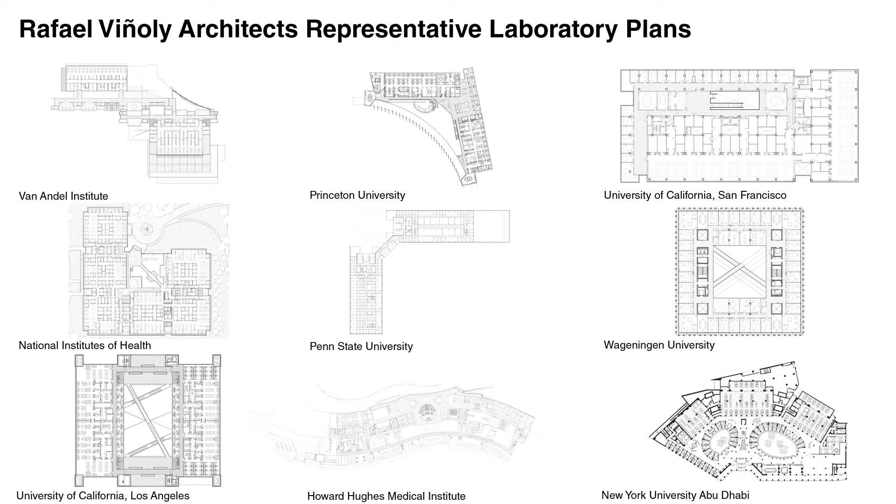These are the plans of those 9 representative laboratories. As you can see, there's no consistent plan representation. Each laboratory is solving specific problems related to the program, the site, or the institution's aspirations.

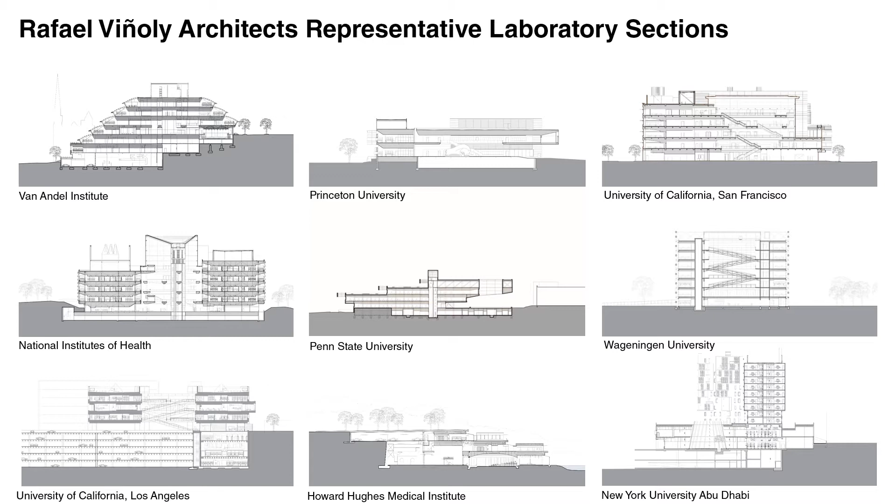These are sections. Again, there's no representative single approach to a laboratory section. We've done laboratories that span across parking garages, that are set into hillsides, or that are meant to be built in modules over time.

Somewhat unique to our office, each one of the laboratories we design has a custom laboratory furniture system which we design and fabricate for that particular project.

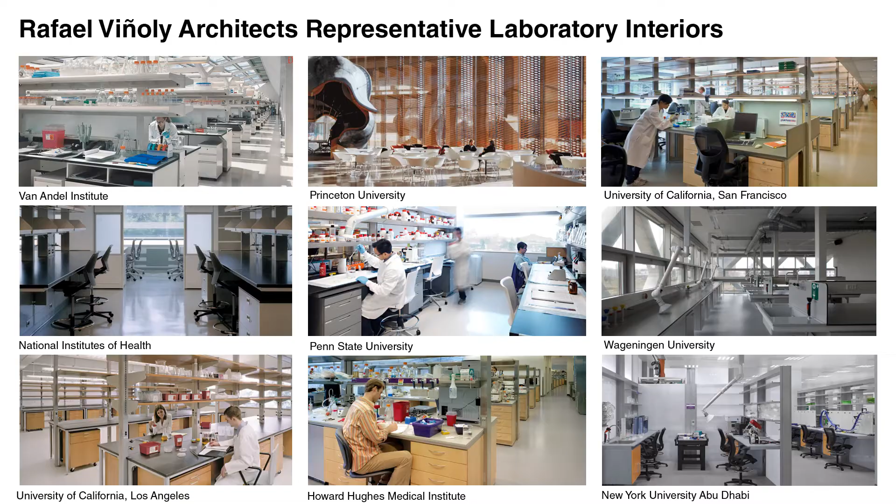All of these laboratories have one thing in common, and that is that the researchers were not identified until the construction of the laboratory was more than 50% complete. In order to deal with that uncertainty, we developed what we call the elemental approach that allows for flexibility in planning and programming of research laboratories.

To give you some background on Rockefeller University, it was founded in 1901 as the first biomedical research laboratory in the United States. The hospital was built in 1910, and it was the first translational research institution in the country.

There are 2 characteristics that set Rockefeller University aside from other institutions. It has an open structure that encourages collaboration, and every researcher reports directly to the president of the university. It has the philosophy that it isn't focusing on particular fields, but recruits scientists that it thinks have high future potential.

As a consequence, it has 26 Nobel laureates, which is more Nobel laureates than the country of France, 24 Lasker Awards, 20 National Medal of Science, 39 National Academy of Science members, and 17 National Academy of Medicine members. As I mentioned, it's located in a dense urban environment on the eastern edge of the island of Manhattan on the East River, just east of Central Park in the densest part of New York City.

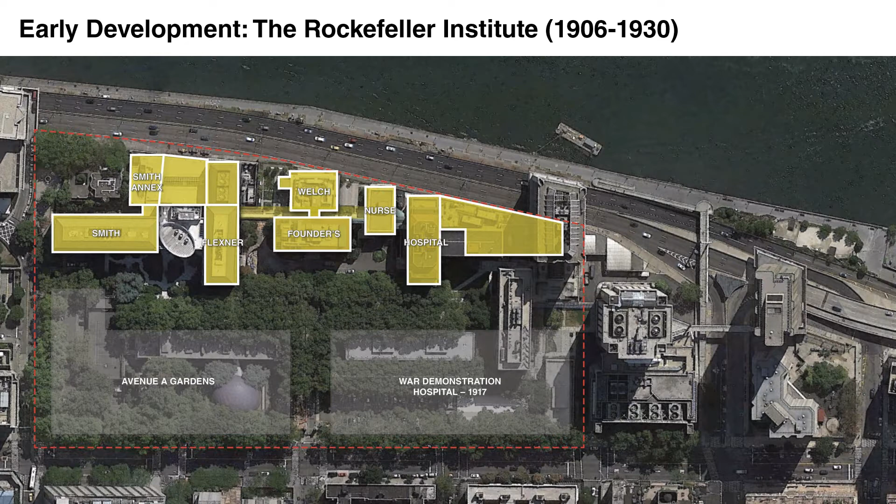This is the site plan of the campus in 1930. Again, I want to emphasize that it's all connected buildings, low-rise to mid-rise, all with individual architectural expressions, but connected with physical connections.

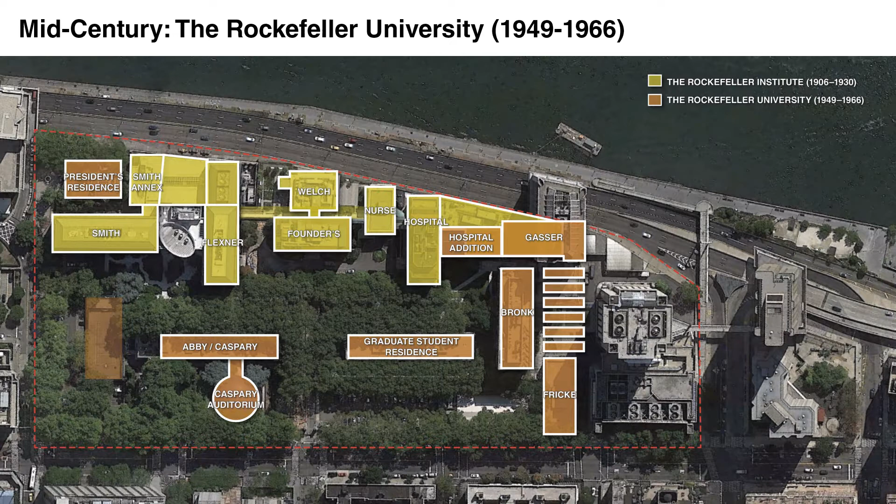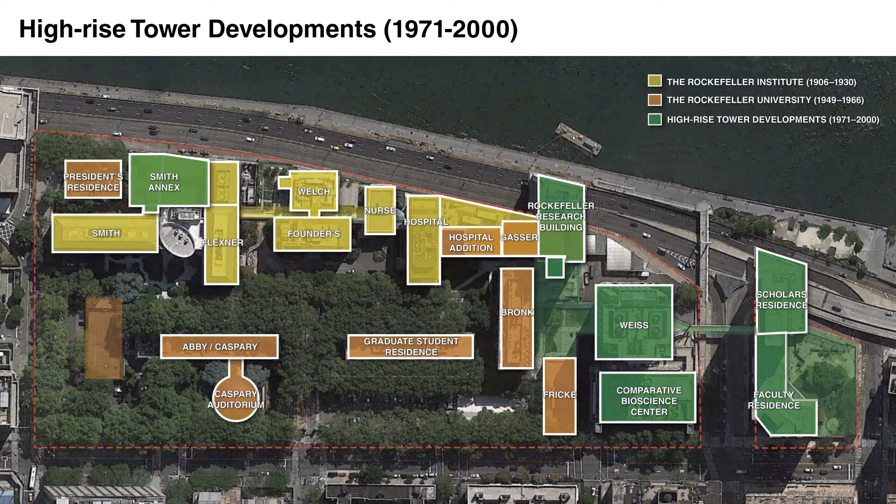Then in the 60s, you start seeing pavilions and high-rise buildings being built, pavilions in the park with no connection to the original buildings on campus. From the 70s to 2000, there was a burst of construction, again high-rise laboratories, 17 to 20 stories tall with small floor plates and large central cores. They also added housing to the campus for professors and faculty.

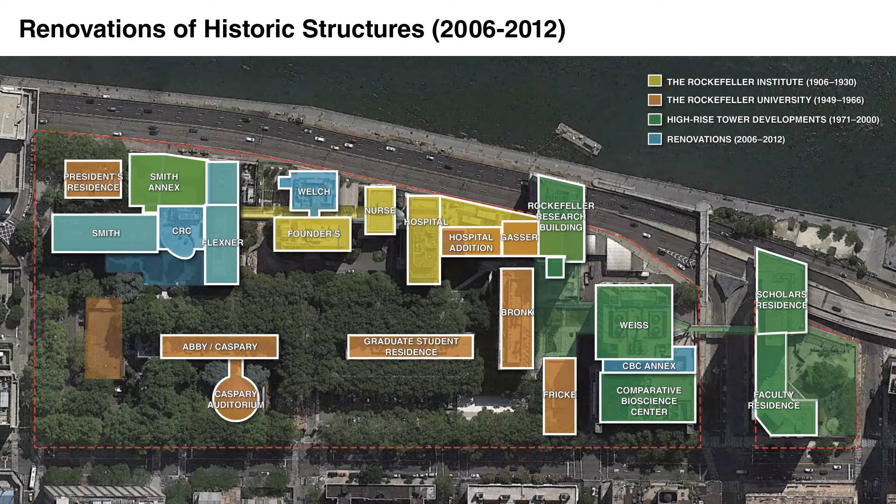About 10 years ago, they also began renovating the original buildings, which were 100 years old at that time, updating the laboratories with state-of-the-art equipment, but the constricted floors and lack of daylight were not able to be altered.

There were three objectives that they asked us to achieve in designing a new laboratory. First, to develop a laboratory that would provide maximum interaction among researchers in support of science, recruitment, and retention of their world-class researchers. They also asked us to provide a diverse variety of collaborative and communal spaces, including dining halls, conferencing facilities, recreational facilities, and offices that reinforced the campus relationships.

The campus is quite beautiful, very well landscaped, very well maintained. The third objective was to preserve and enhance the campus landscape, maintain the views of and from the historic buildings, and reinforce the pedestrian scale of the campus.

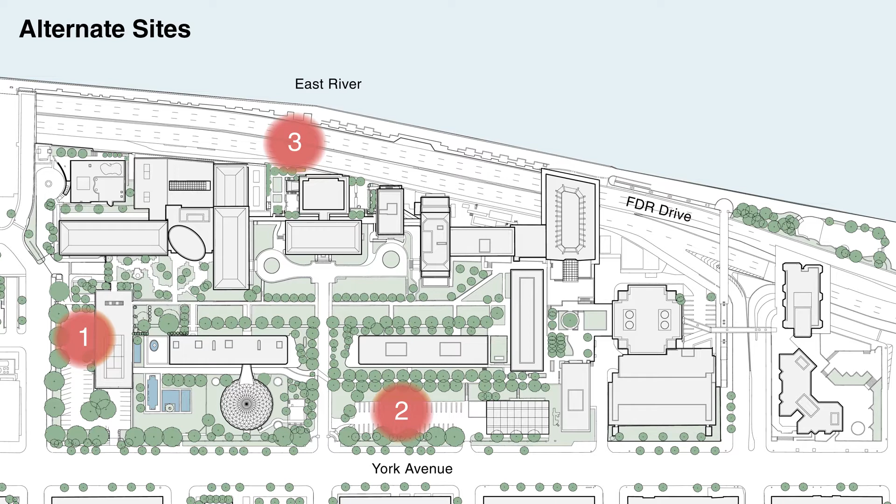We looked at every building on campus and all the available sites, and identified 3 potential sites for future laboratory space. Each one offered a distinct massing for the same program. Option 1 would result in a 14-story building, each holding about 16,700 square meters of research. Option 2 would be a 6-story building, and option 3 would be a 2-story building built over the highway that separated the university from the East River.

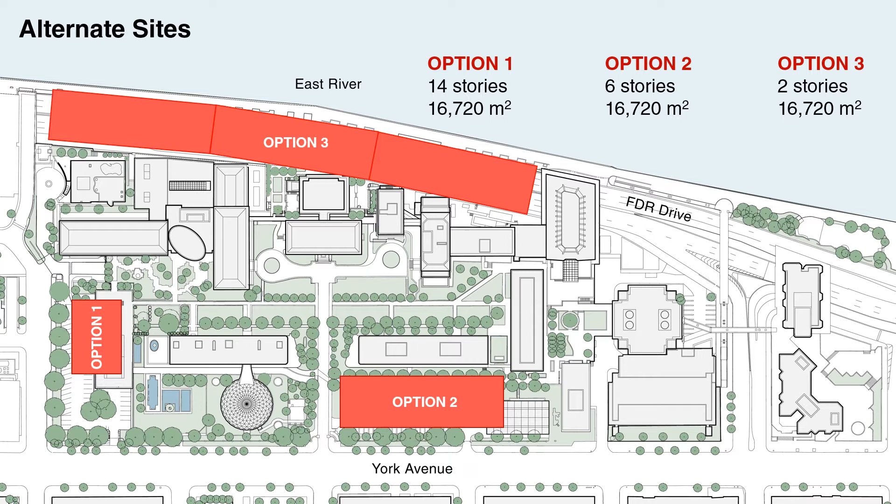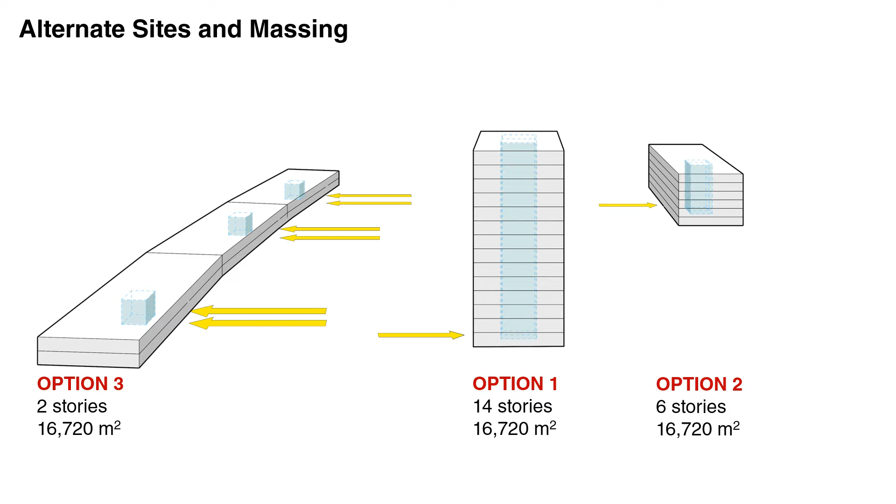You can see here the 3 massings: the 14-story tower, the 6-story low-rise/mid-rise building, and a 2-story building with 3 cores and multiple entrances built to the east of the existing original campus. We elected the option that provided for the 2-story building built above an active highway and connecting all of the original buildings.

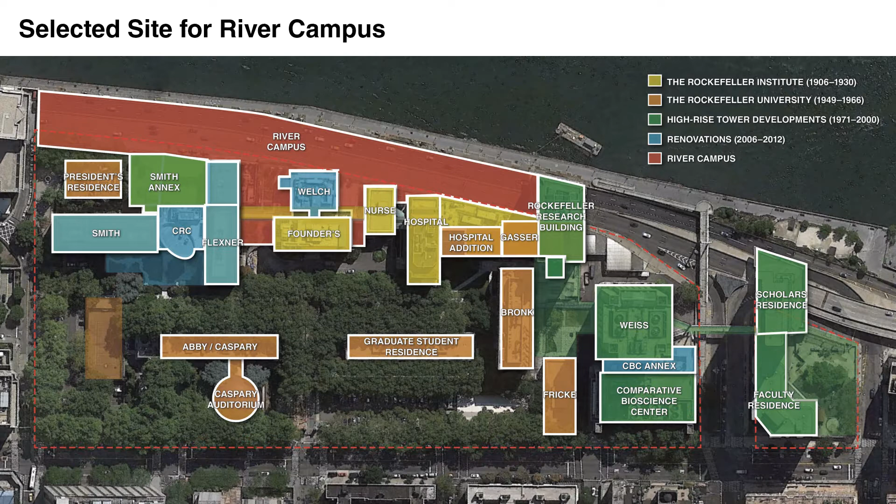As well as some new construction and some renovated construction, we selected the building with the largest possible floor plan that would provide the greatest amount of flexibility and the greatest amount of community within the building, so that researchers were not segregated by floor, but were in 2 levels of continuous space.

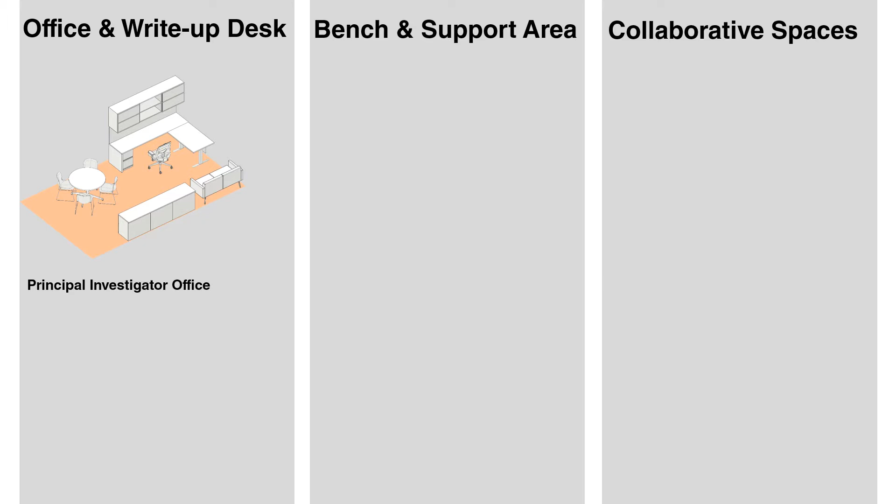So what is the elemental approach to the design and planning of laboratories? We see that there are 3 types of spaces in a research building: office and write-up desks, benches, support spaces, and wet walls; and collaborative spaces, meaning conference rooms, break rooms, lounges, and things like that.

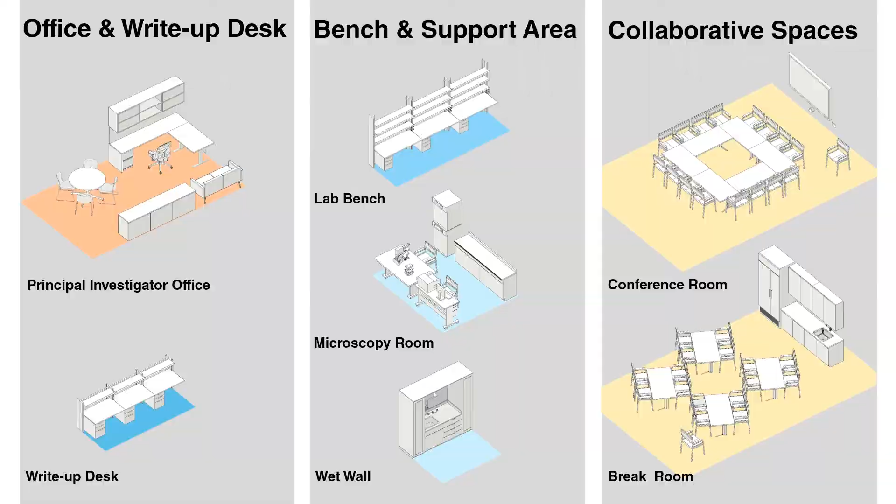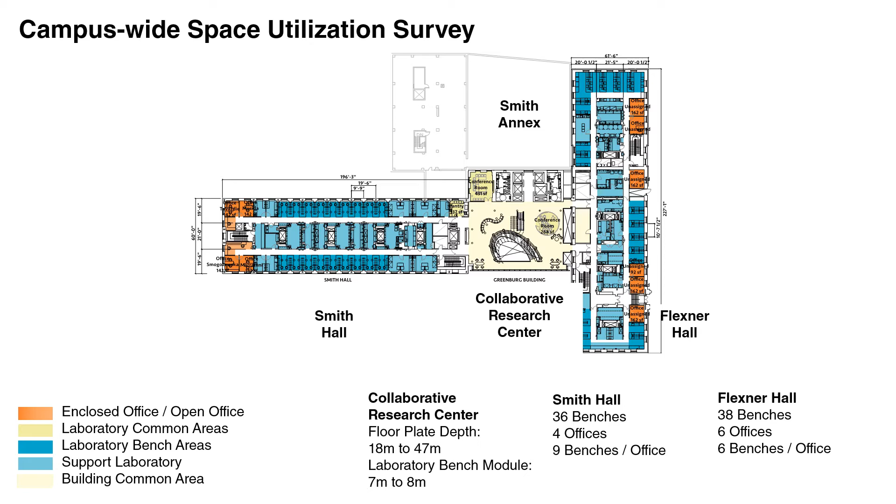We surveyed every single building on campus and identified the amount of area for enclosed offices, for benches, support space, and common space. Then we graphed all of those buildings and identified the area for the lab bench related to the enclosed office and related to the common areas in each building.

That's because a mature institution like Rockefeller with small floor plates tends to have labs grow and contract, but you can't backfill because you don't have enough space to bring in a new laboratory, and you don't have enough space for a current laboratory to just expand on the same floor. It has to wait till space opens up.

So this is the argument for large floor plates that allow easy expansion and contraction as laboratories grow or decline over time. If you draw an average of the number of occupants in every laboratory on campus, you find that there's about 18 researchers with a principal investigator occupying each lab.

We found that if you looked a little further, about 40% of the laboratories were one principal investigator with 8 researchers, and about 60% of the laboratories had a population of one principal investigator with 24 researchers. So we knew we needed a plan that would allow for a diversity of lab sizes without wasting space or becoming inefficient.

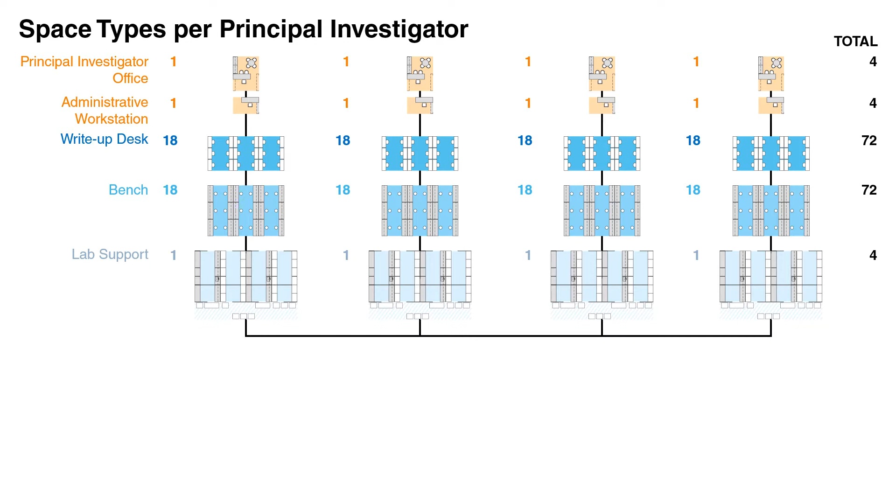So we return to the 18 average to do our plan calculations, and we said that for each principal investigator we would have 18 write-up desks, 18 benches, and slightly more than double the amount of support space. Then we would add, for each 4 labs, a break room and a conference room that could be shared, with the conference room big enough to hold 24 people if a laboratory grew to that size. All those labs would share into a lobby common to the whole building.

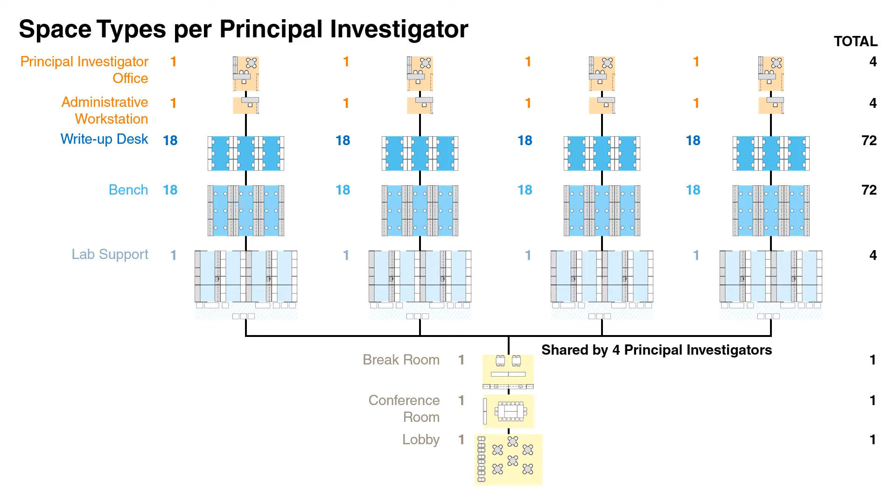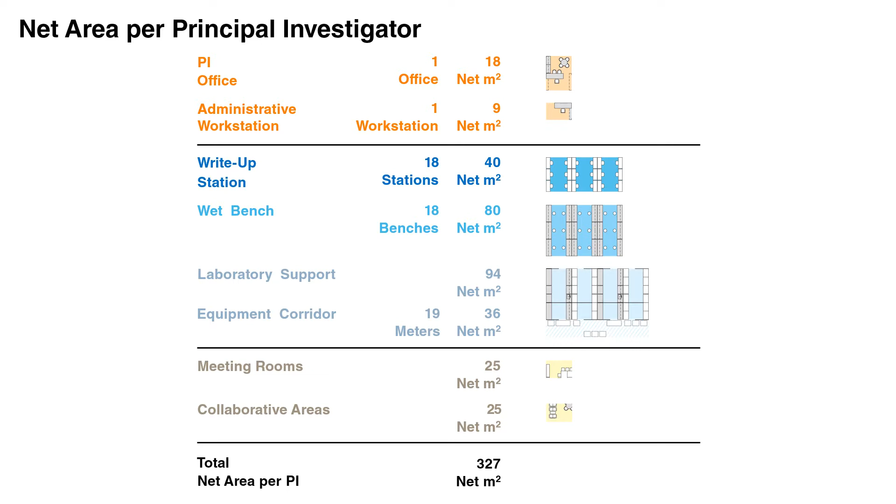So the net area per principal investigator was 327 net square meters for each 18-person laboratory. And then we compared that to several of the labs on campus and other laboratories we had done, most notably the Howard Hughes Medical Institute.

That was the program. Then in 2018, when the building opened, we found that we had 23 principal investigators with 462 researchers, and they occupied slightly less than what we predicted, 8,230 net square meters. So we were able to accommodate labs from a size of 6 researchers to 30 researchers in a space planned on an average of 18 researchers per principal investigator.

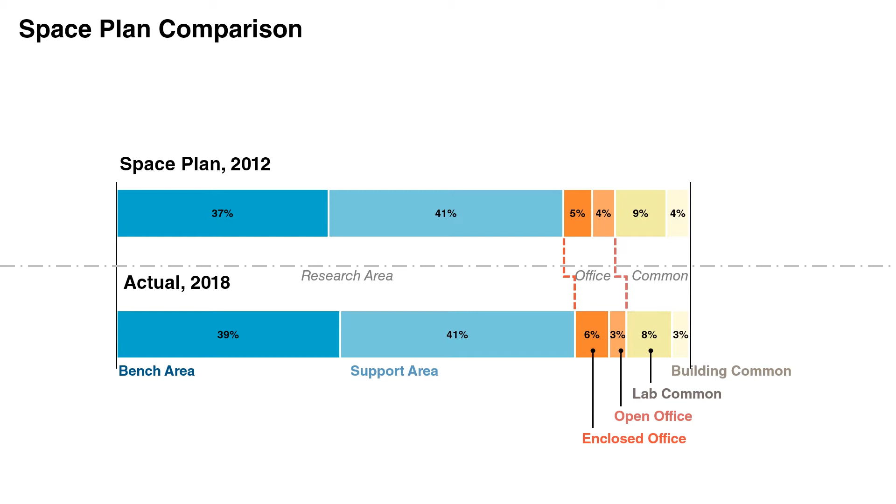Here you can see how the projection of bench area went from 37 to 39%. So there was an increase in the need for bench area, so the bench area increased. The enclosed offices were basically the same. Open offices took up slightly less area, and the lab and common spaces are about as projected.

We made a specific decision to separate the write-up desks from the lab benches for several reasons. One is it promotes a greater sense of community because now all the people working at write-up desks are adjacent to each other, and it actually creates a much safer environment where you're not working next to hazardous materials, and it improves the ability to socialize.

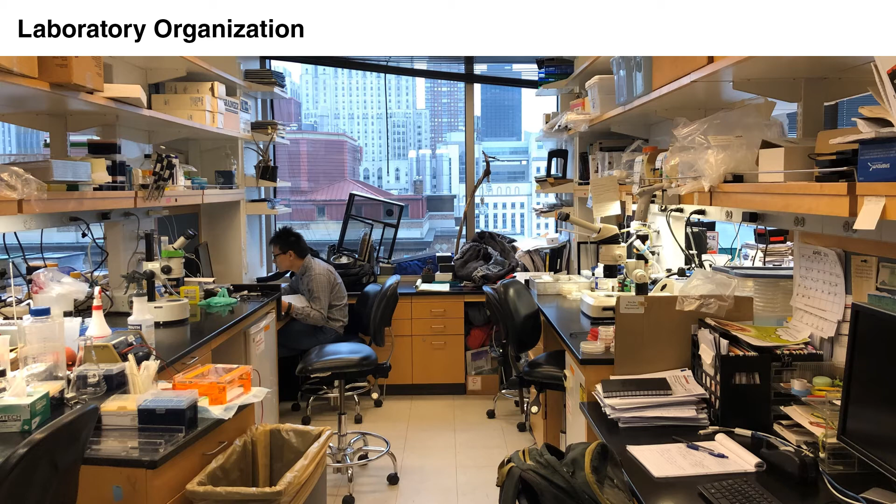To the right is floor-to-ceiling glass with all the write-up desks. There are principal investigator closed offices, and the break rooms and conference rooms punctuate the space along this, basically, 300-meter long corridor. And then to the left, you see the benches, and behind the benches is the support space.

So the flexible integrated laboratory has the dry lab office and write-up, and the wet lab and support. Everything is designed in a modular way on a 600 grid so that 3 write-up stations can replace 2 benches, or 2 benches can be put into the space of one office, and you can plug and play.

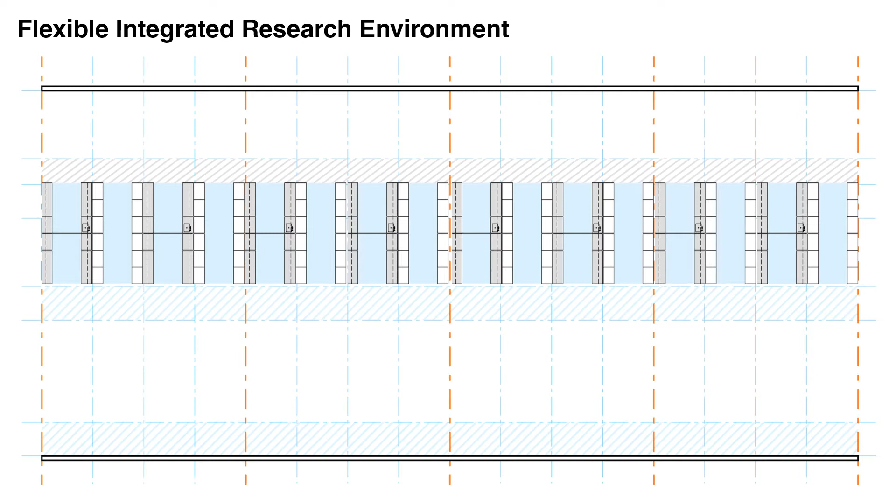The partitions can be built with the same system that's supporting the benches or the write-up stations. We wanted to be able to move benches into support space if the need for bench space increased, and to have support space move into bench space so that you weren't fixed to a predetermined ratio for each lab between bench and support.

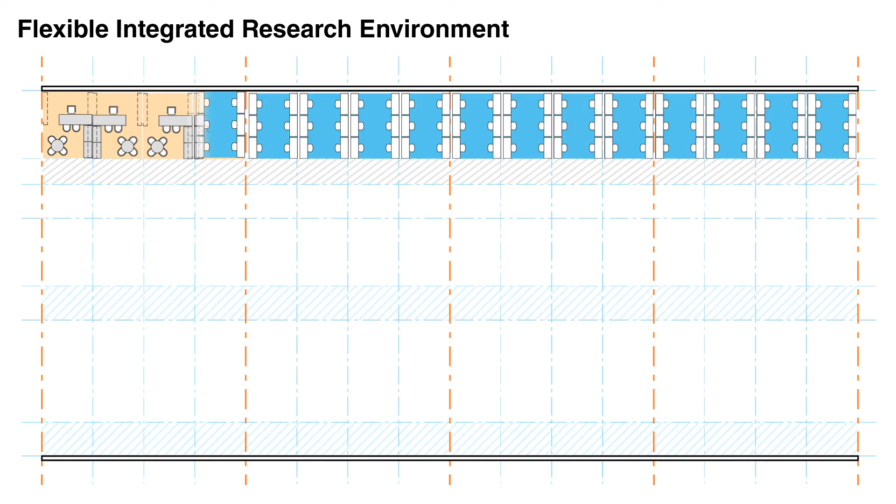That proved to be enormously successful in the final project. All the write-up stations and offices were along the eastern wall of the building, which is floor-to-ceiling glass and can be interchanged and converted from write-up stations to closed offices, all within a modular system. Every one of these potential moves was explored as we fitted out the laboratory after it had been 90% completed, and we interviewed the researchers entering the building.

So this is just showing a variety of ways of taking the same space and using it for bench support, or closed collaborative environments, or private offices.

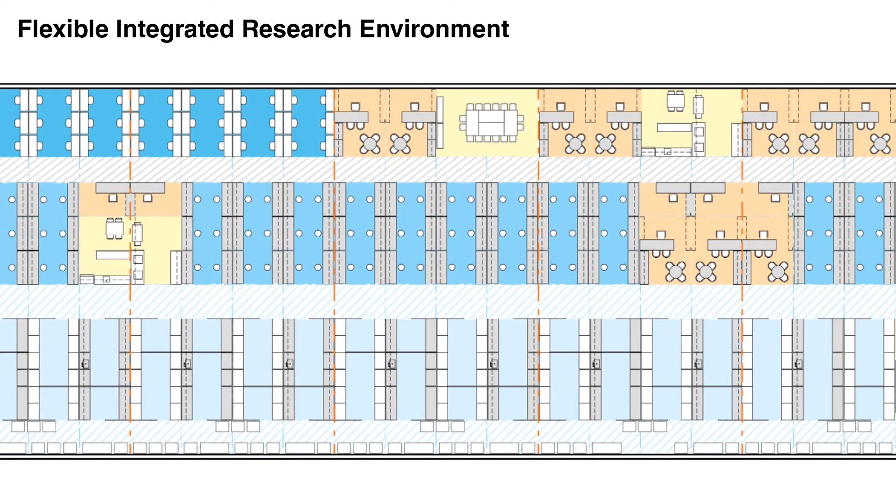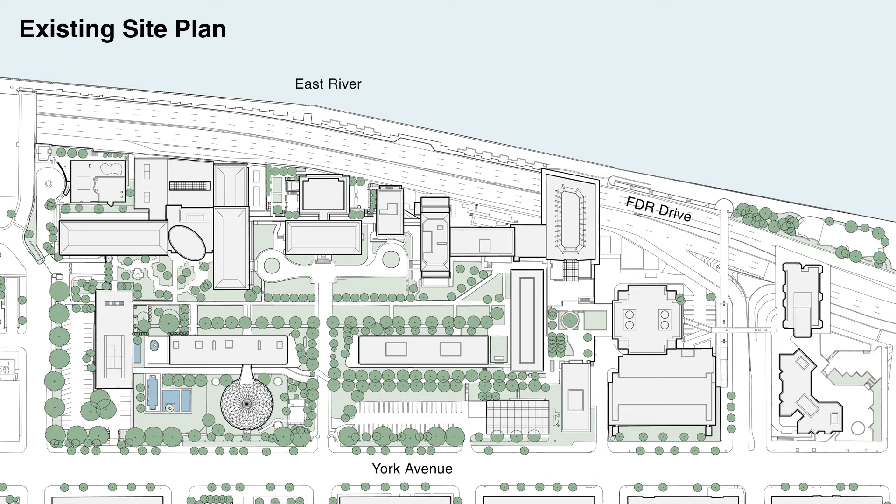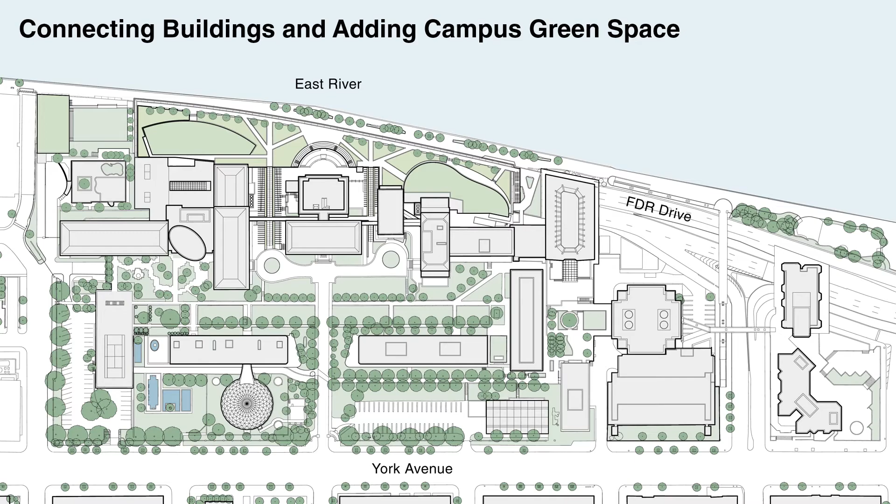Specifically, I'll take you through some drawings and photographs of the resulting project. There's the East River, the original building. Looking at it, we extended the campus out, added about 10% more open land area to the campus with green roofs and collaborative pavilions set in the garden.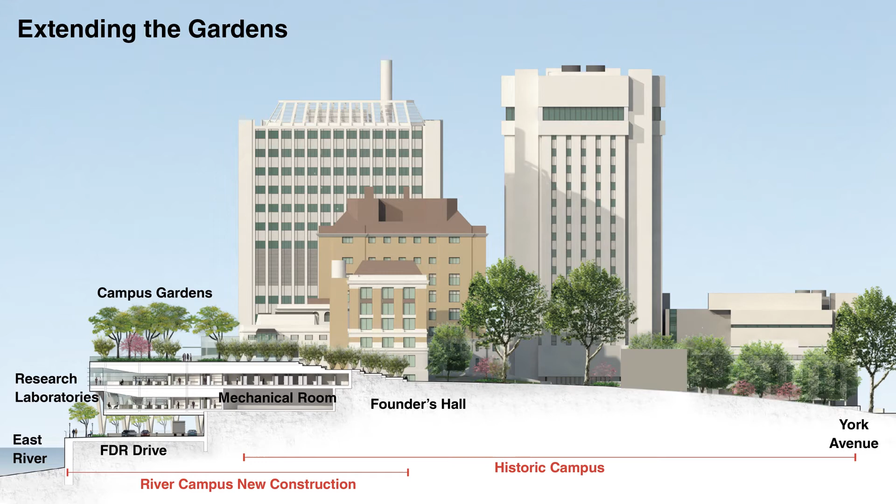Here you see the section, and this is the most important drawing that I'm going to show you. From the campus side, which is to the right, you climb up to the original buildings on a slight slope, and that slope continues up very gradual stairs onto the roof of the river campus, so that from the original Rockefeller University landscape, you do not see the new building at all.

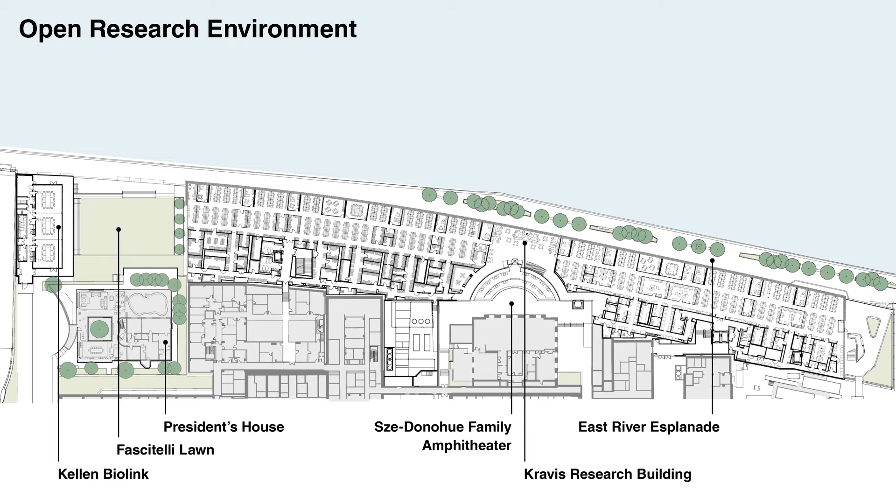It's completely integrated into the landscape and then tied at multiple points into existing buildings, so that there's one front door, but there are many individual doors from each one of the original buildings that are over 100 years old.

This is the actual floor plan after we had met with researchers and satisfied their programmatic requirements. You see the break room and conference rooms shared by 4 researchers, and you see the bench space.

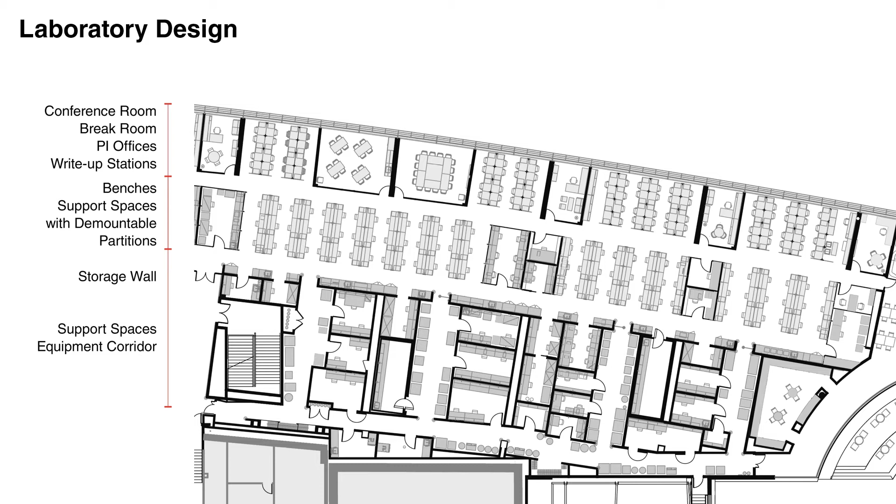We added flexible support spaces, built from the same casework system supporting the benches, served through an underfloor system of power, data, and gases. Then you see the equipment corridor, wet wall, separating the bulk of the support spaces from the bench space.

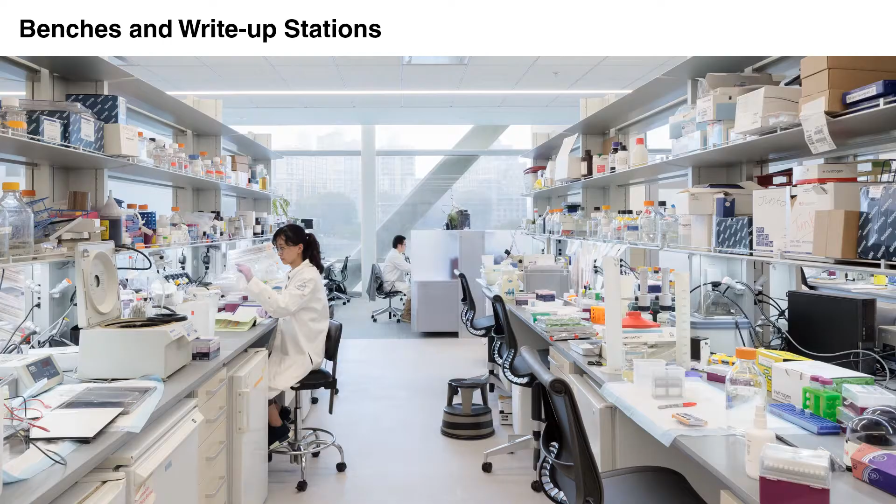Then when you're looking closely at the laboratories, this is the bench space. You're looking across circulation to the write-up stations, which are along the glass wall. Another shot of the laboratory benches, which are supported on service modules that connect to the floor, and all the utilities come from below the raised floor. So every bench can move on a module of 600.

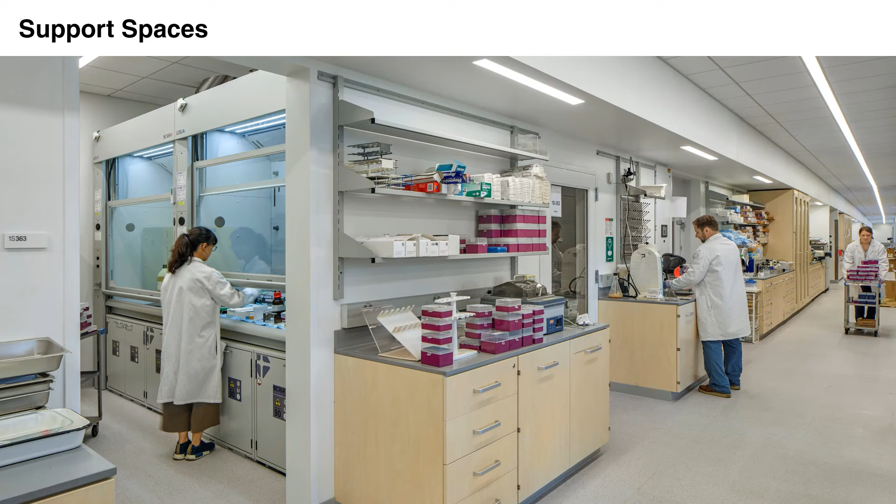There's a wet wall that runs the 300 meters on each floor that has all of the plumbing, and behind that are all of the fume hoods and more fixed equipment that is not as easily adjustable as the benches and the write-up stations are.

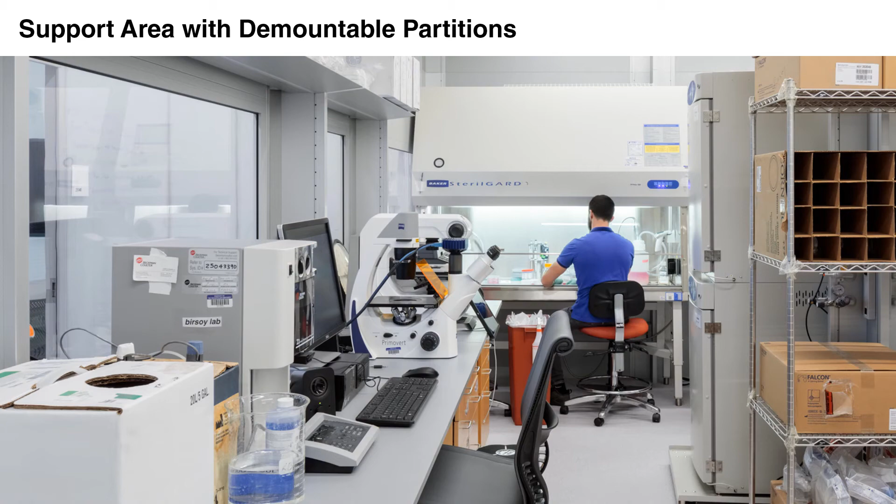And then in the middle of the bench space, this is a support room that's built out of the same vertical service modules with flexible partitions. These can be demounted, and you can increase the size of the support area or replace it with benches as the lab needs change.

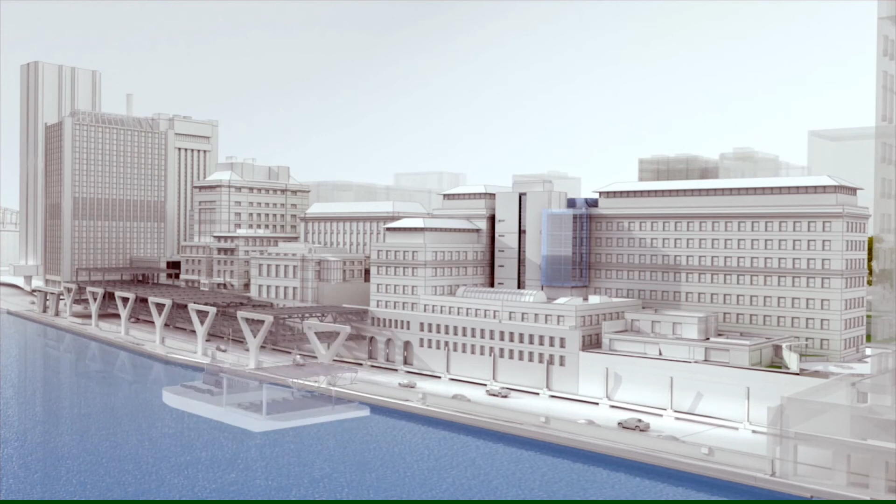Rafael Vinoly had an inspired vision to use our air rights over the FDR Drive, which David Rockefeller had wisely acquired for the university in the 1970s. The centerpiece of this plan was a new research building. The plan was to build 19 steel and concrete platforms, swing it into place over the FDR Drive, get it in place, clear and open the FDR Drive all within one hour. And this had to be done 19 times.

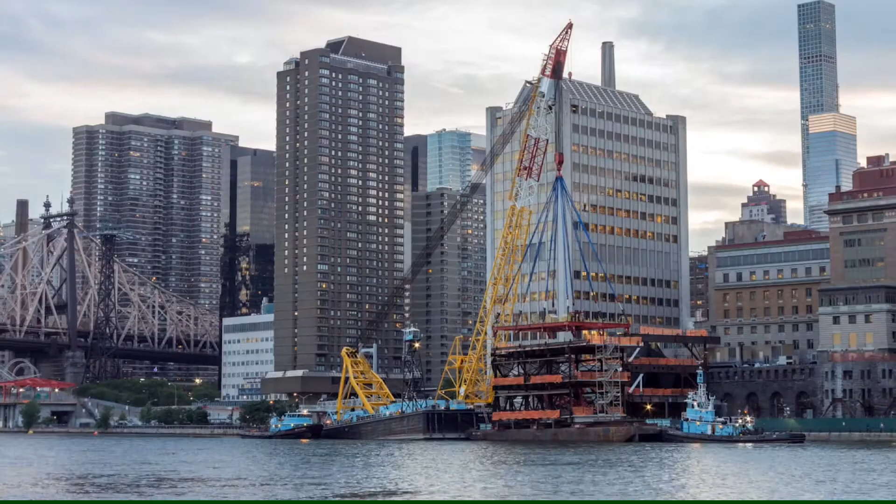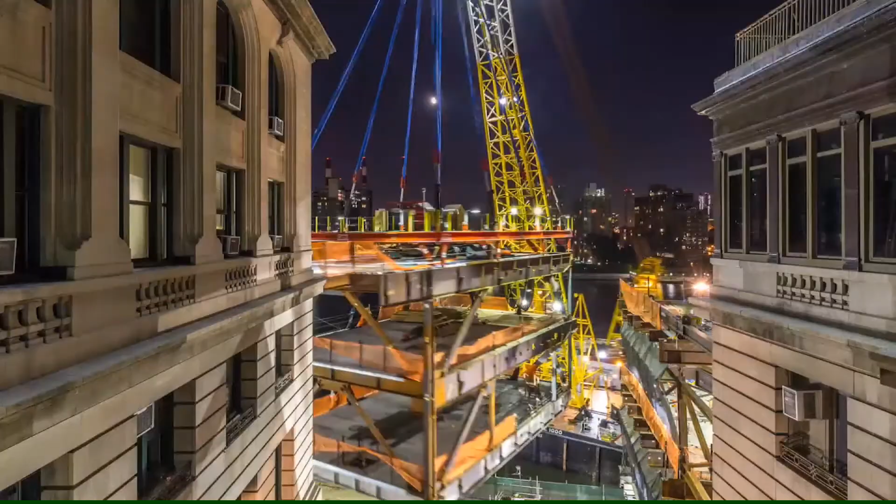That June night in the summer of 2016, when we were hoisting that first module, to pull that off successfully over the FDR Drive from a tidal river in the middle of the night, my heart was racing.

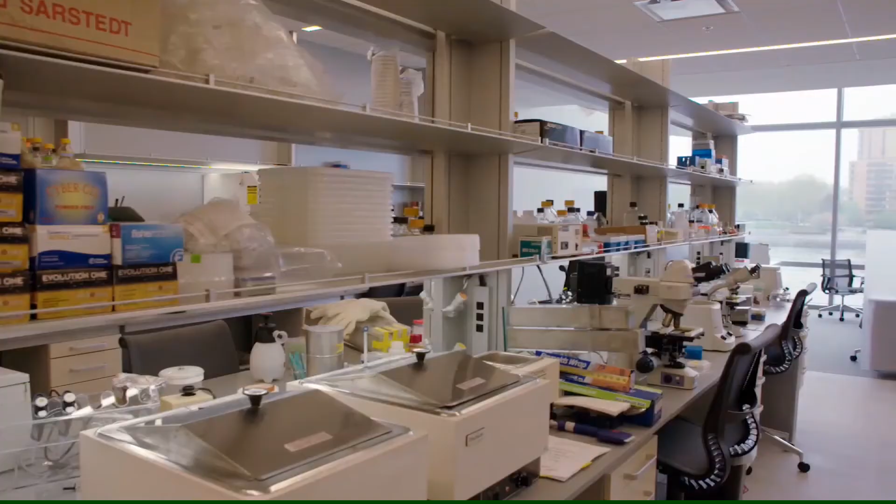You walk into the building and you think, oh my God, if I could work here, I could do great things.

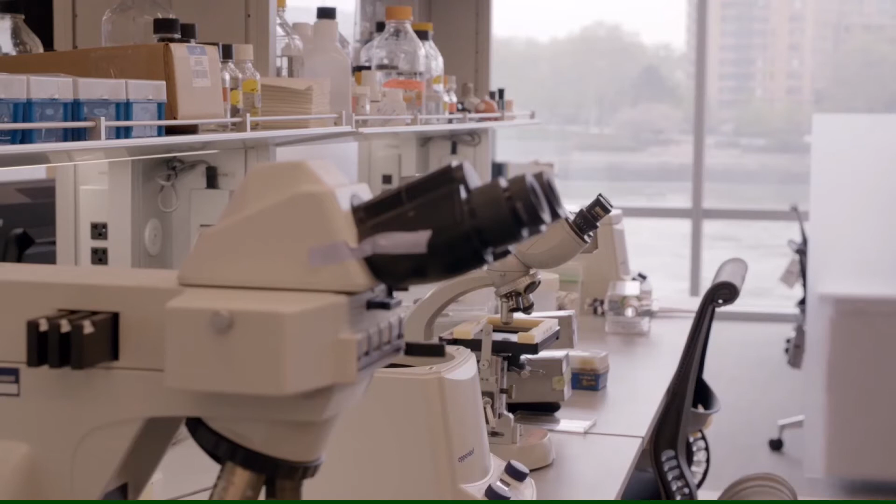Working at Rockefeller was an incredible opportunity for any emerging scientist, but to add the River Campus in, it's a game changer. The opportunity to work in the Kravis Research Building definitely played a major role in my decision to come to Rockefeller. It's got junior investigators mixing together with senior laboratories, other junior investigators, all in an open environment.

On one side of my lab will be the Zhao Lab and the Jarvis Lab. On the other side, my neighbor will be Amy Shyer, who is a recent recruit just like me and who has an interest in biophysics, which is the field that I came from.

The Kellen BioLink will be a terrific convening space for the local, national, and international scientific communities. This is going to be bringing leaders from around the world here on the Rockefeller campus to this new BioLink building.

Bass Dining Commons is another terrific element. It'll revive the tradition we had long ago of everybody eating at communal tables and sharing ideas. That's where so many amazing scientific stories were born.

There is nothing more welcoming to the human soul than to be on green, overlooking the water and the sky. A garden is truly good for all of us. The scientists lead such intense lives. For them to be in an open space with themselves or with other scientists, I think it helps to inspire them and invigorate them to do the very best they can.

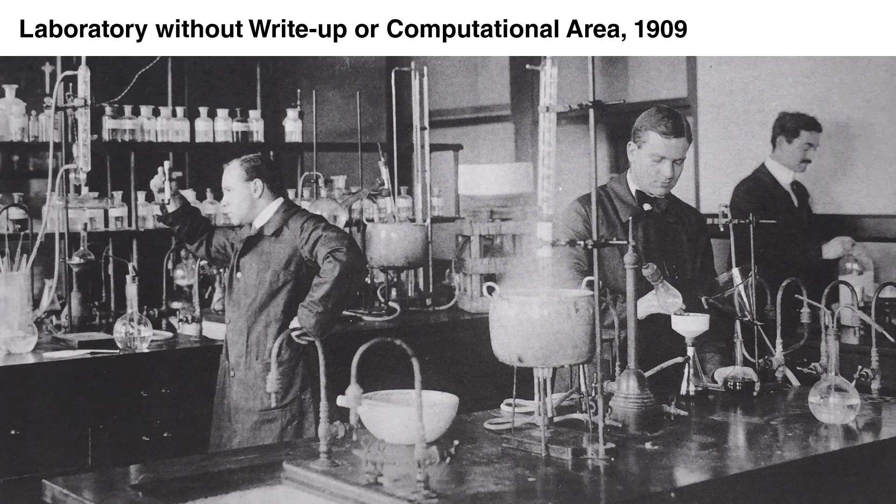And then I want to close by briefly summarizing the evolution of our laboratory casework designs. This is a photograph from 1909, and you can see benches, all wet science and no write-up stations.

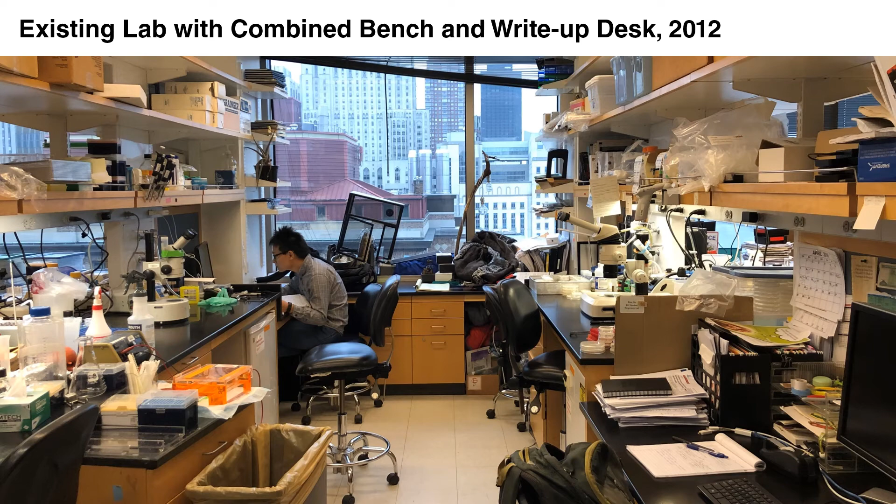And then this is an image I showed earlier of a laboratory in 2012 where there are write-up desks, but they're at the dead end of narrow corridors, close to hazardous materials, and then you're very separated from your fellow researchers.

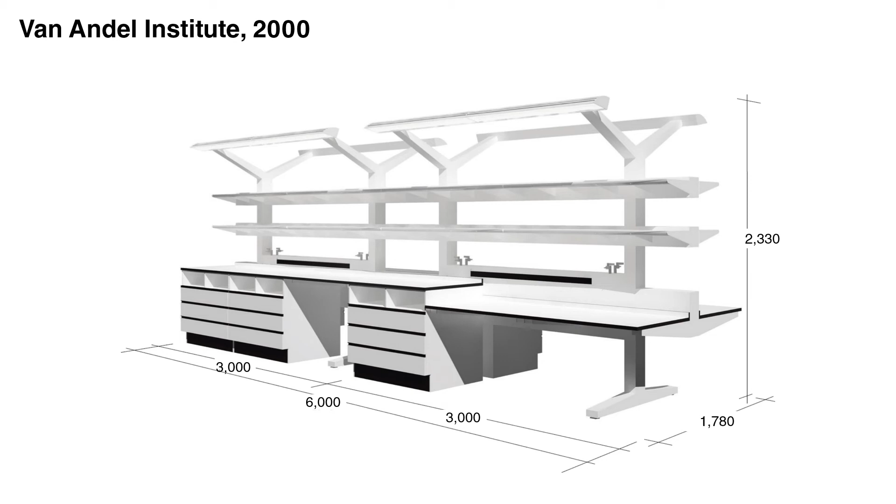We started in 2000 with a custom design for the Van Andel Institute, which saw lab benches as individual pieces of large furniture that were connected along a horizontal spine for their services, and everything was distributed horizontally out from the horizontal spine. They had their own built-in lighting, and they sat under a translucent roof that provided 90% of the light during most of the days.

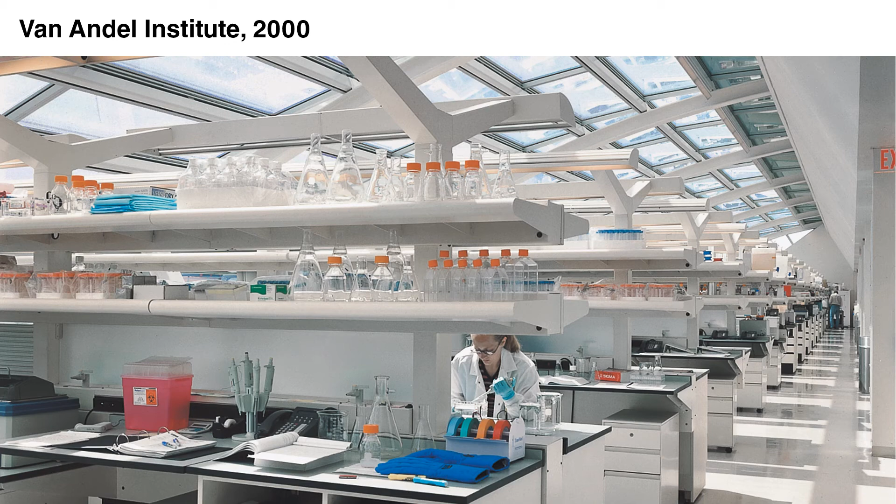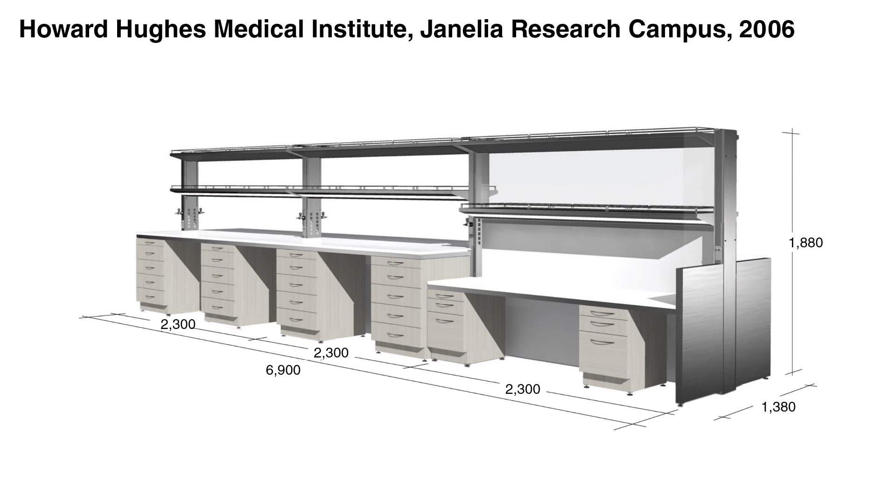Then in 2006, we started looking at ways to distribute services from below the floor, and that meant that you could disconnect. You didn't have to have a continuous line of benches as shown here. You could take the middle bench out because each bench was independently serviced from below the floor.

And this is the finished product. Again, it looks like a fixed lab bench, but each element, each drawer, each refrigerator, each shelf can be detached from the ones adjacent to it.

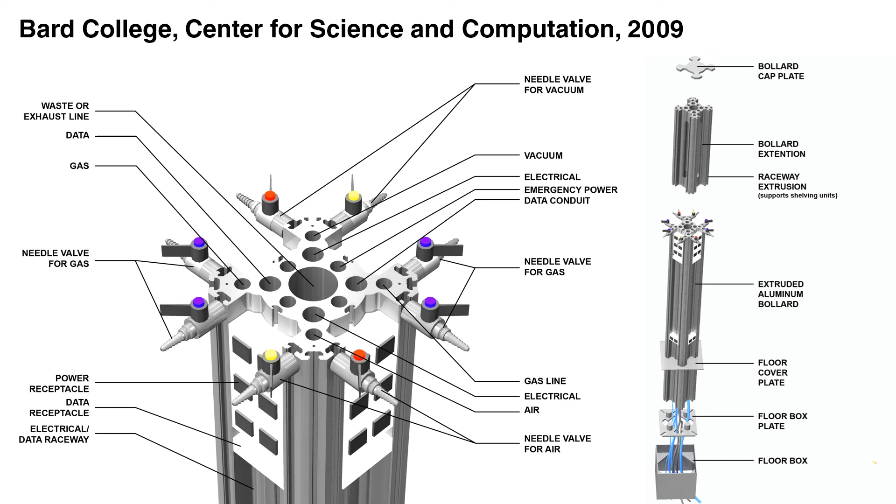And then in Bard College, we carried the idea into a teaching lab where we actually extruded. We don't have conduits. Every utility is carried in a separate extruded channel within the vertical service module.

And so this is it when it's used in its research mode, but the tops of the modules can be removed when you're in a classroom mode and you still have services without the shelves for storage.

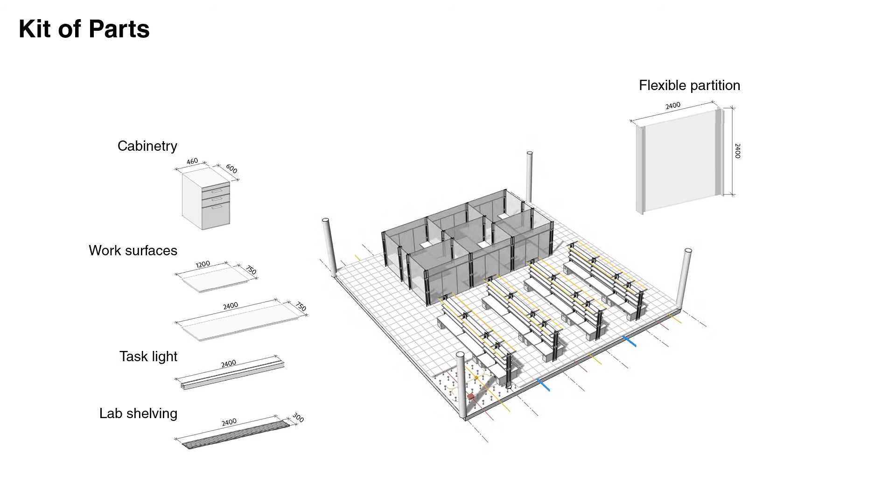So for Rockefeller, we developed the kit of parts, again, all on a 600 module that included partitions, cabinets, work surfaces, lighting, and shelving. And they all are carried on a structural concrete slab, but there's a raised floor beneath which all of the utilities run.

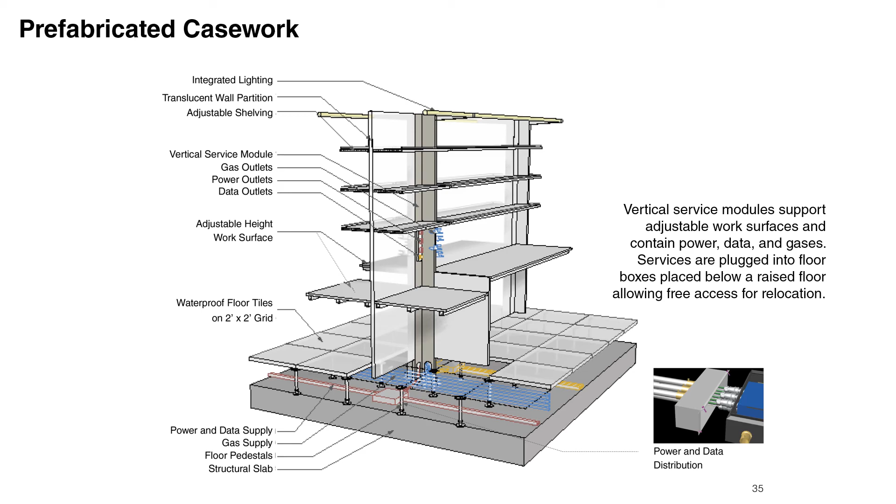So vibration at the lab bench is minimized because it's on the concrete structure of the building, and then you're walking on a raised floor.

In this case, we used aluminum extrusions again, and each channel carried data, power, or gas, depending on which of the 4 quadrants you were looking at.

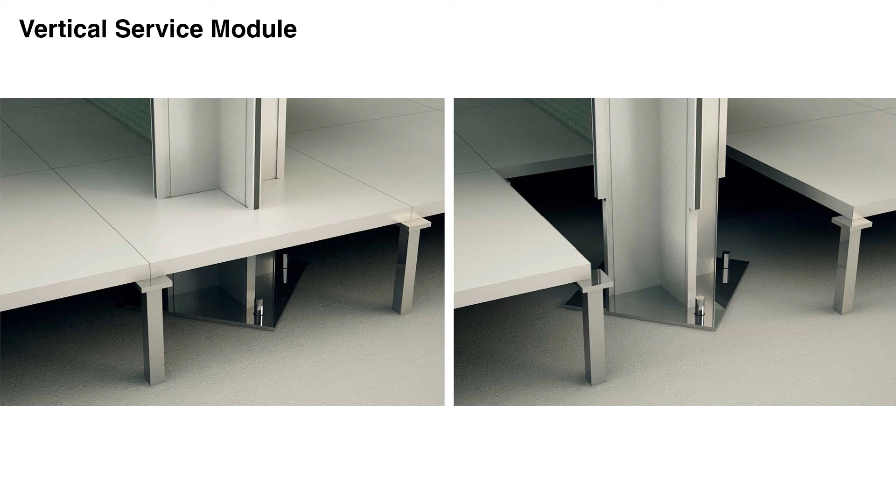Here you see the service module connected to the concrete floor, and the raised floor, and every module can be picked up and moved 600 to another grid on the floor tile.

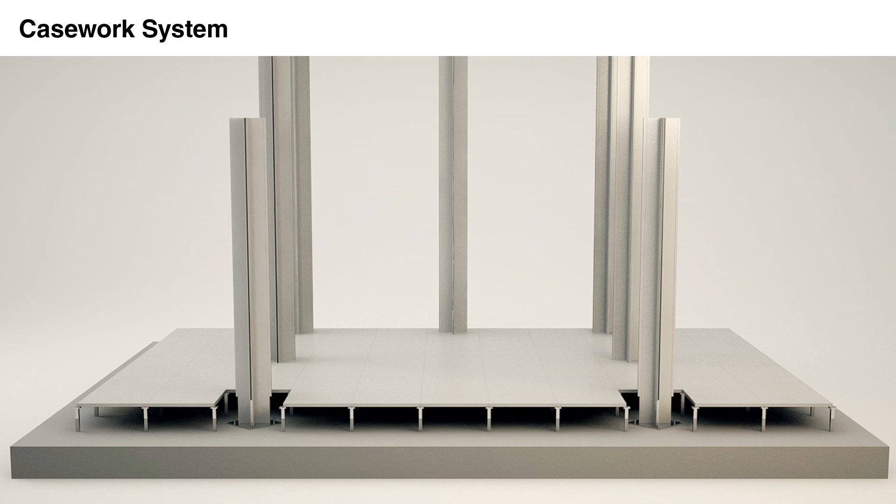And every service module was moved from the time the building was completed to the time the individual researchers took over their labs. The work surfaces are cantilevered and they are adjustable in height.

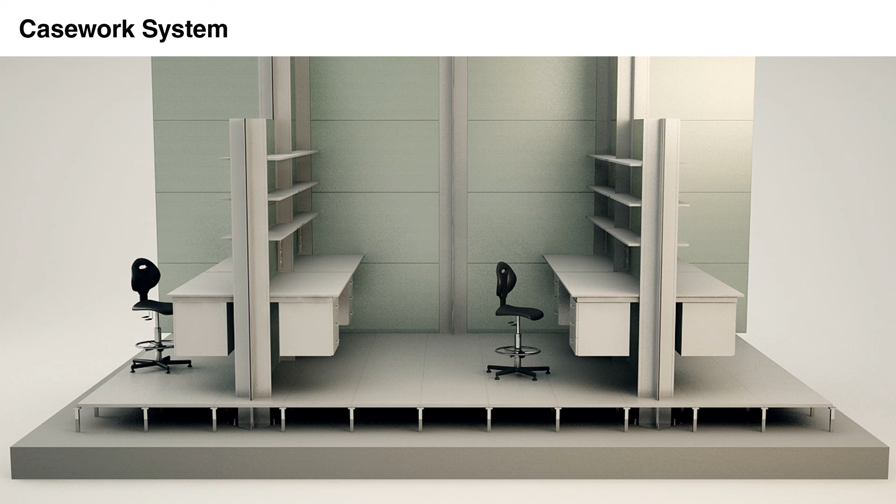And then the cabinets are suspended from them as well, so the floor is kept clean for easy maintenance. And then the partitions plug into the vertical service modules for their structural support to make the closed rooms.

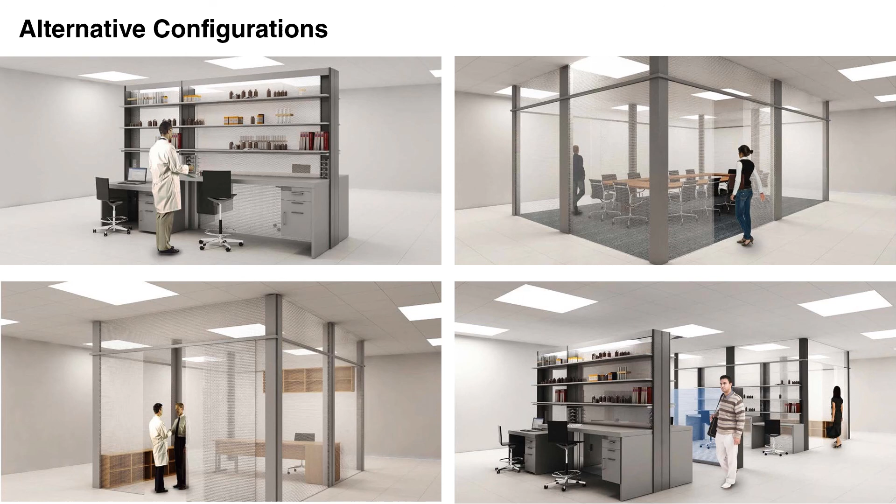And then these are a variety of configurations that you can achieve, all with the same kit of parts, from closed offices to benches to support spaces.

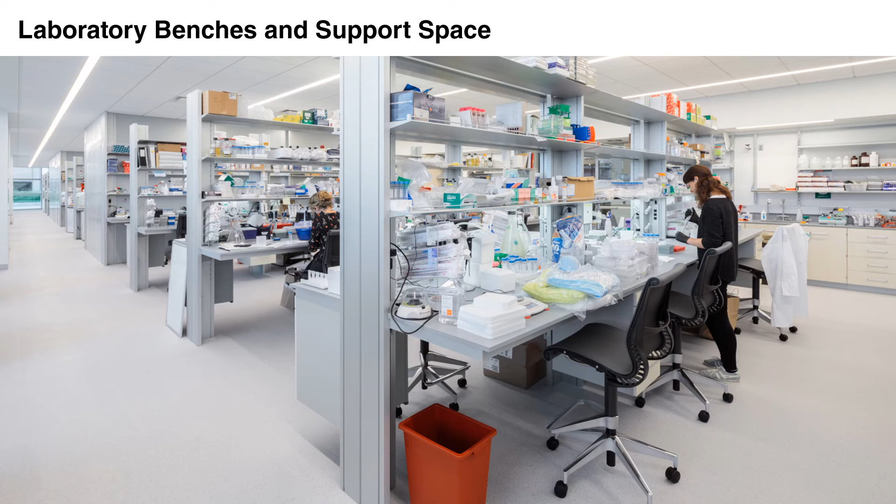And this is the occupied laboratory and support space, again, separated from the write-up stations.